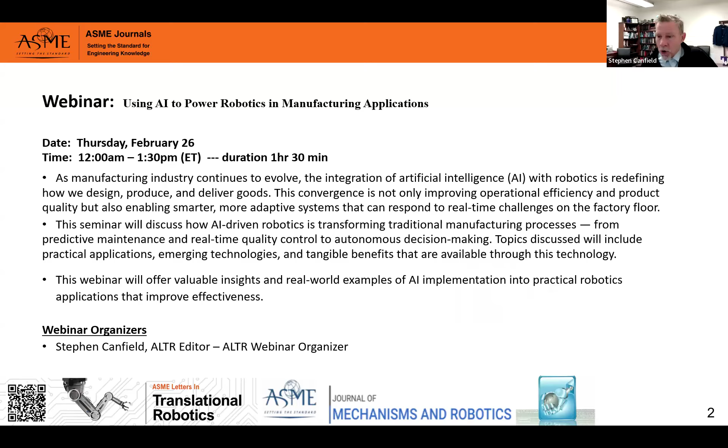Over the recent past, artificial intelligence is everywhere. It's been driven by technologies and many organizations; we see algorithmic advances, we see it in our popular media. But much less seen is this strong push for physical AI and particular applications to complex manufacturing challenges. We have with us today really the leaders in this field of physical AI applied to robotics, and I'm delighted that we have them and we're going to hear from them. The convergence of these technologies is transforming manufacturing. In today's session, we're going to explore how AI is redefining industrial automation, explore underlying technical methods, emerging technologies, and discuss future applications. So to get started, I'm going to briefly introduce our panelists.

Our first panelist and lead panelist is Dr. S.K. Gupta. He holds the Smith International Professorship in the Aerospace and Mechanical Engineering Department and the Department of Computer Science at the University of Southern California, where he also founded the Center for Advanced Manufacturing.

Prior to this, he was professor in the University of Maryland, College Park, where he was the founding director of the Maryland Robotics Center and Advanced Manufacturing Laboratory. He's a national leader in robotics. He served as the program director for NSF for the National Robotics Initiative.

He's a guest researcher at NIST, currently a member of numerous technical advisory committees, including the ARM, the Advanced Robotics for Manufacturing Institute, Advanced Automation for Robotics, and the National Materials and Manufacturing Board. He's a co-founder and chief scientist for GrayMatter Robotics, a company focused on robotic automation solutions for high-mix manufacturing applications, and he'll share more on that.

Our second panelist is Blair Simmons. He's an automation chief engineer at Raytheon with expertise in all things robotics, automation, and system engineering. He served in multiple roles at Raytheon as lead automation systems, manufacturing, and mechanical design engineer. He received his MS and BS from University of South Florida.

And our third panelist is Christopher Brown, a Boeing Technical Fellow in the Manufacturing Systems and Robotics in the Emerging Production Systems Organization within Boeing Technology Innovation in Tukwila, Washington. First, we'll have to correct my pronunciation on that. He's been with Boeing for over 20 years, providing automated solutions for various applications on composites, trimming, drilling, inspection.

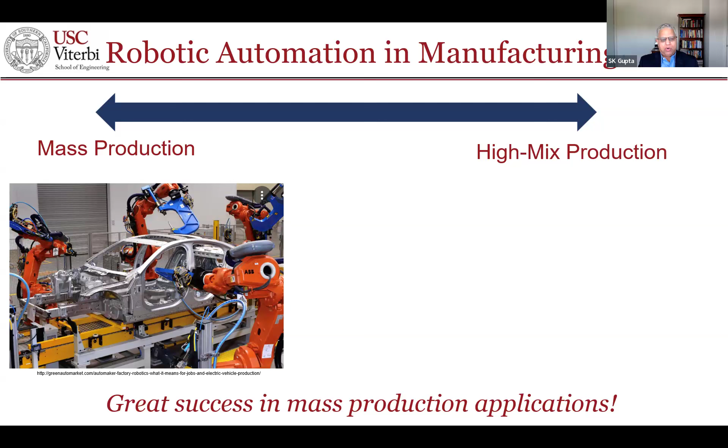Okay, so I'm going to begin with a quick introduction to this topic and show you some examples. So robotics in manufacturing application, if you look at the entire landscape, you find out that robots get used a lot in mass production, driven by all the advances in automotive and electronic sector, where everybody is using robots in these mass production lines. On the other hand, if you look at the high mix productions, robots are not utilized that much. So overall, we want to investigate what happens in high mix and how we can put robots in high mix production applications.

So the robots that get used quite a bit in mass production applications have certain limitations which make it difficult to directly apply them to high mix applications. If you have a mass production application, you're going to be using this line for years, and therefore you have a lot of time to initially set up the line, program the robot, optimize everything, and then the line will just run and keep doing the same thing over and over. And that gives you tremendous benefits and your return on investment works out.

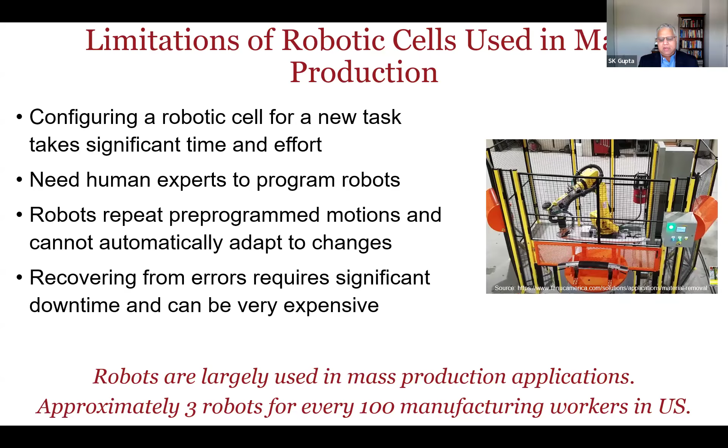However, if you have a high mix production application, then this concept where you are going to spend months building a robotics line and then utilize it is not going to work, because the part that's going to be fed into the high mix setting will change frequently. And therefore, this idea that humans will come in, program the robot, optimize the cell is not going to work. So robots currently are largely used in mass production applications, approximately 3 robots per every 100 manufacturing workers in the US.

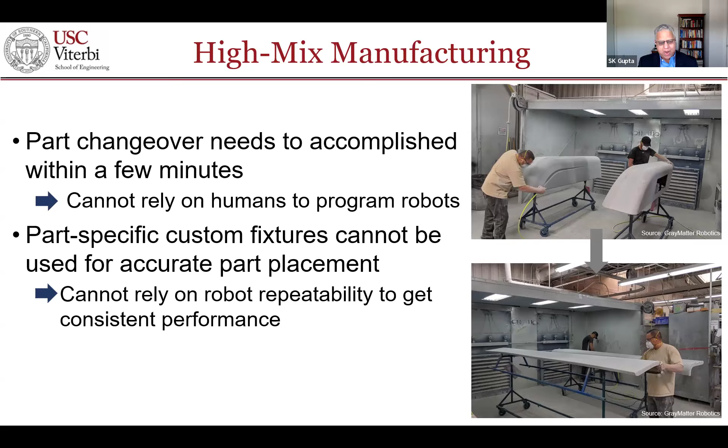In high mix manufacturing applications, part changeover needs to happen quickly. You're doing one type of part, then you need to start working on another part, and this transition has to happen very quickly. And you cannot use part-specific fixtures. You have to use general-purpose fixtures to hold the part, and therefore you cannot rely on the accuracy of fixtures to deliver the right kind of performance. And robots have to be quite flexible, intelligent and smart to work in high-mix applications.

So the reality today is that if you go look at a lot of high-mix application environments, lots of people are doing sanding, polishing, buffing, grinding, spraying, coating type of tasks by hand.

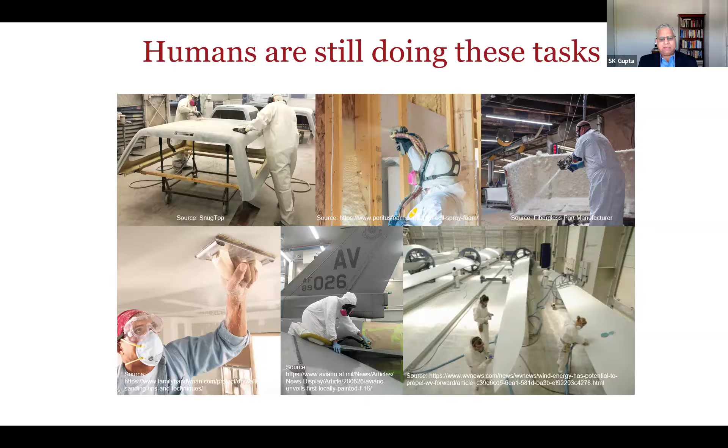And these are ergonomically challenging tasks. And people would prefer if bulk of this work can be done by the robots. If you look at the manufacturing challenge today, there are a significant number of jobs which are forecasted to go unfulfilled. There's a lot of labor shortage being reported by the manufacturing sector.

As I mentioned before, many manual operations pose serious health risks for humans. Many companies are reporting significant backlogs. And when you have a large churn of human workers, you also start seeing the issues with respect to consistency of the quality, and therefore then you start experiencing rework and scrap and consumable waste type of challenges.

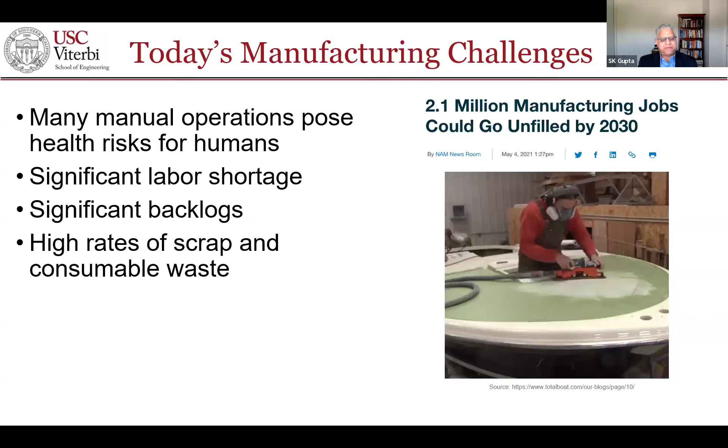So the right way to think about addressing this challenge would be to increase the level of automation in high mix applications. There are 3 key things which are currently driving progress in this overall field. One is availability of low-cost sensors. We have all kinds of sensors now available at reasonable price: 2D vision, 3D vision, tactile sensing, force sensing.

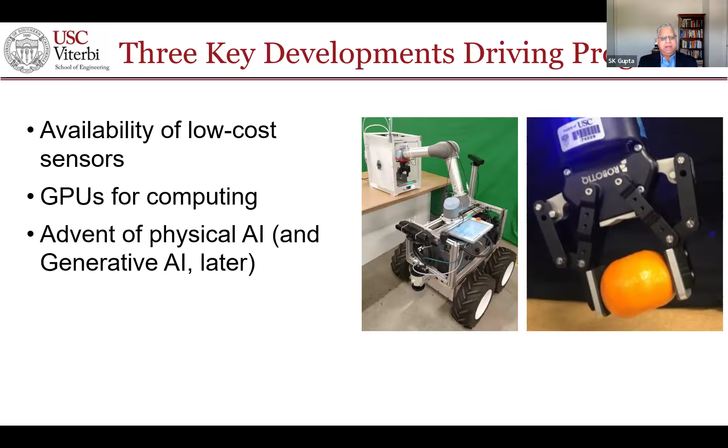GPUs, which can actually make edge compute super fast as well as cloud compute super fast. And then all the recent advances in physical AI and generative AI are also giving basically new fundamental capabilities, which is changing the landscape quickly.

If you look at the specific advances in robotics, people are beginning to now leverage stereo vision, force sensing, tactile sensing. The field is going well beyond simple position control. People are looking into impedance control, visual servo, shape control, all kinds of new control modalities. We can now do multi-arm manipulation where multiple arms can be coordinated, and therefore we can handle high degree of freedom systems.

Mobile manipulation is here, which allows the robot to go to work as opposed to work coming to the robot. And we have collaborative robots where humans and robots can work in close proximity of each other. So all these advances are creating new opportunities for us to utilize robots.

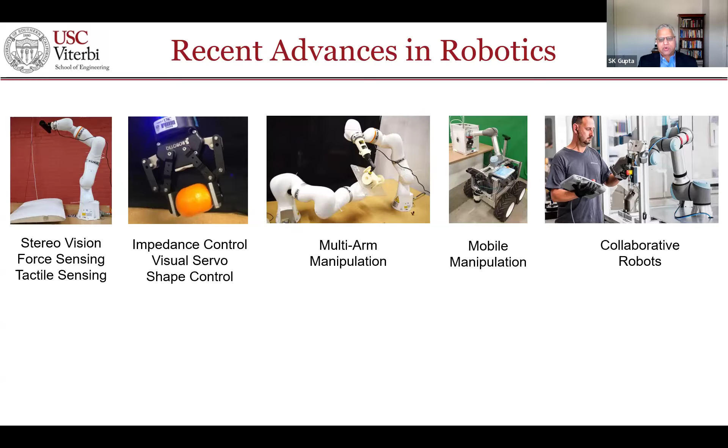So my own work is largely focused on human-centered automation. The idea there is that we want to empower people by giving them robotic tools so that the work which people should not be doing and do not want to do is actually done by the robot. So we empower people, reduce their health risk, and boost their productivity. And that's a way to handle the labor shortage issue.

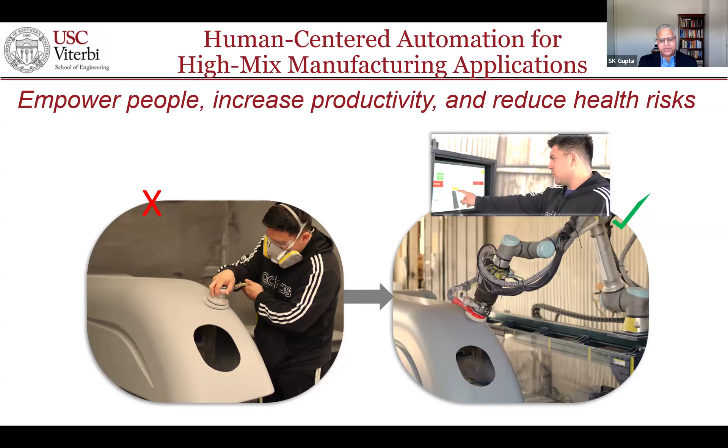Now, why do we need AI? If you look at these challenges in the production setting, the tool motions are complex, parts are large, people are often moving around them, so it's a loco-manipulation problem. People are often making adjustments right when they're doing the process, and even figuring out what the right process is for a new material, new geometry, new type of tool takes effort.

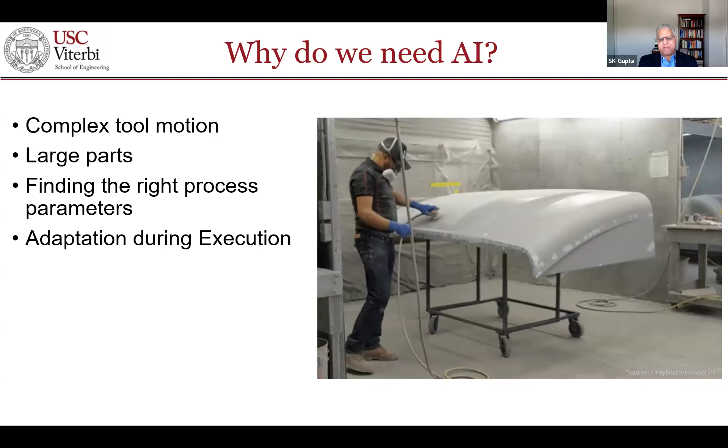So again, old style, mass production style robotics would say we should spend weeks or months figuring it out and then program the robot to do it, but that's not going to work. So the hope is that AI can actually sense the part, build the model, generate the appropriate motions, regulate the process, and even discover the right kind of process conditions to process the part.

So AI-powered robotic cells have at the bottom layer the hardware: the robots, the tools, the sensors. There's a tremendous amount of industrial robots available. So in manufacturing applications, we can continue to leverage them. And as new hardware becomes available, we can use that.

A lot of tools are already available for grinding, welding, sanding, polishing, which we can all leverage. And as I mentioned before, there are a lot of sensors available now. We can leverage them as well. So hardware-wise, a lot of good stuff exists that we can adopt from mass production. What we need is a layer above it.

We want physical AI, which basically gives the robot capability to function autonomously. And then we need robot access to process knowledge so that they can go ahead and execute the operation. This process knowledge can come from humans, and it can also come from the robot conducting its own experiments. And at the top, we need the right kind of human-machine interface so that humans can interact with these cells.

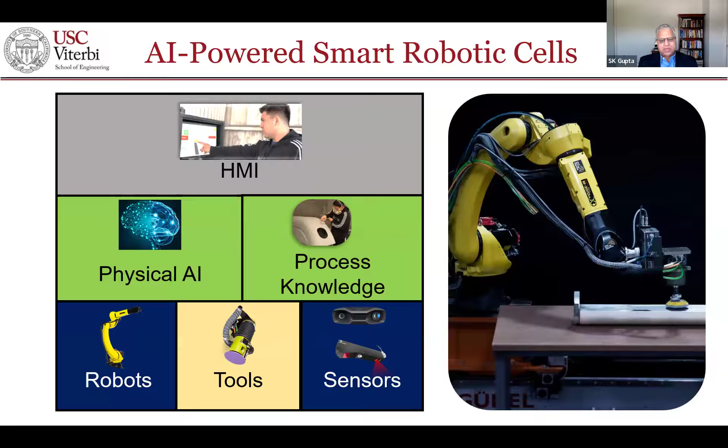So I'm going to walk through a wide variety of representative AI applications, which will show you how people are beginning to use AI in these manufacturing applications. I'm just going to go through this list quickly, show you some videos, show you some images.

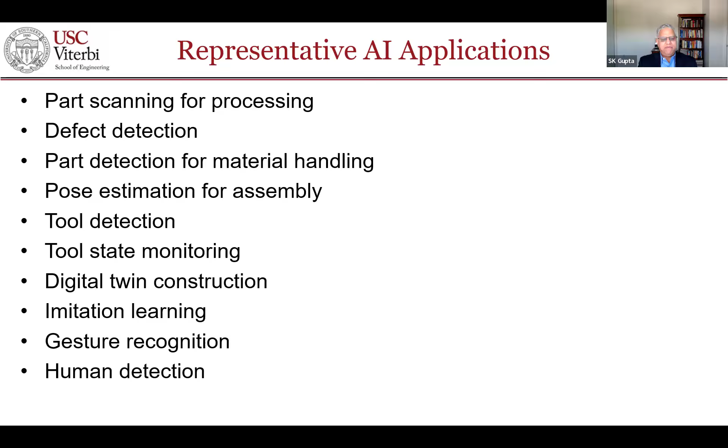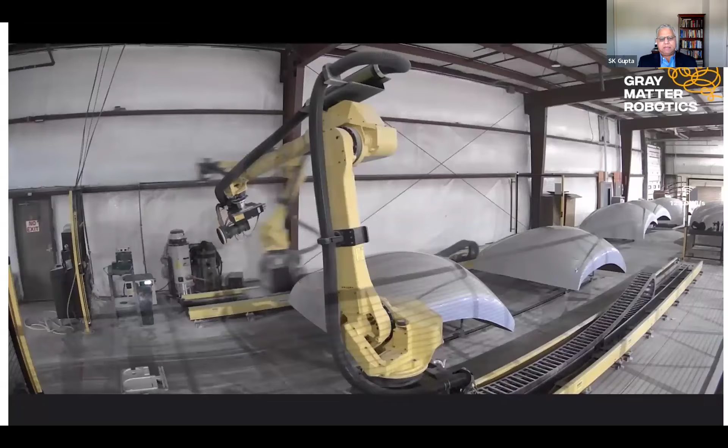So here is a robotic cell built by GrayMatter Robotics. And the idea here is that this is a dual robot cell used for performing sanding on large parts. The idea is that the operator feeds the part into the cell on a standard cart; there's no part-specific fixturing needed here. The robot scans it, builds the model, segments the model, identifies all the features which are there using the scan data, and then performs processing.

These parts are large. The cell does not assume that any CAD model exists. So it basically treats the part as a new part and then uses AI to figure out how to process it. So that's an example where AI is being used both in building the part model, segmenting it, doing the planning, and driving the robot motion.

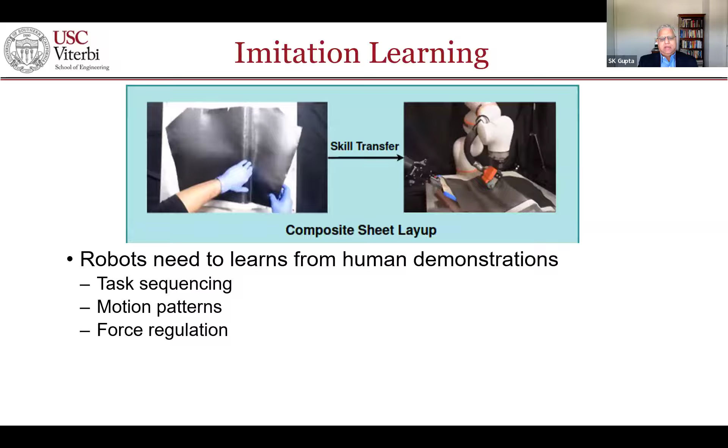Another interesting way where people are beginning to use AI quite a bit is to learn from human demonstration. People want to see how humans were doing the task and then get that information transferred to the robot. And then the robot can start from whatever humans were doing, and hopefully after that, they can do their own experiments and do better.

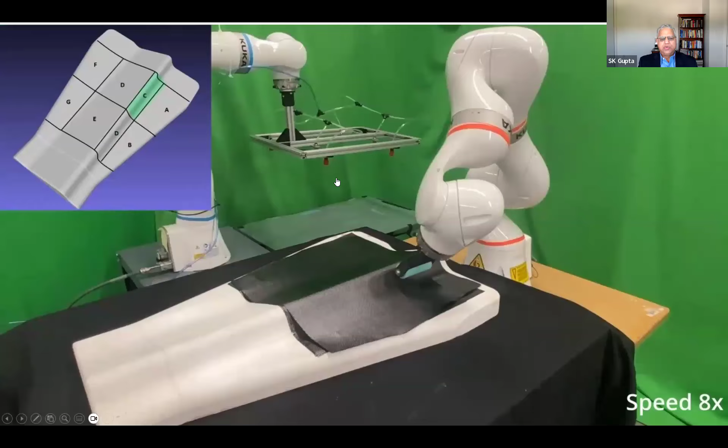So here is an example where we have a fully instrumented cell in our lab. It's full motion capture. We are capturing all the human motion, the way humans are doing it. And the tool is instrumented, so we are recording how much force the human is providing. And then the idea is, could you transfer whatever you saw from the human to the robot?

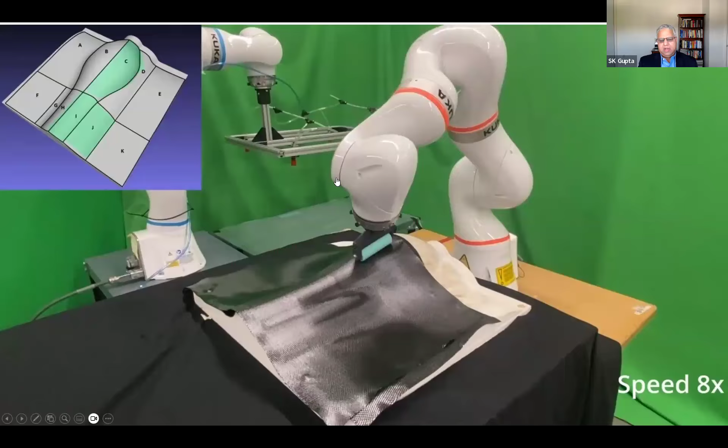And it turns out that you can use methods in inverse reinforcement learning to learn what humans were doing and get the sequence and motion right, and not only replicate the motion on the part on which the demonstration was done, but also on something slightly different.

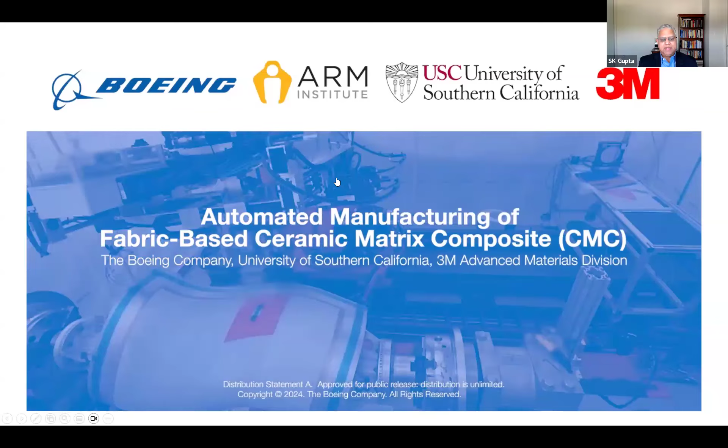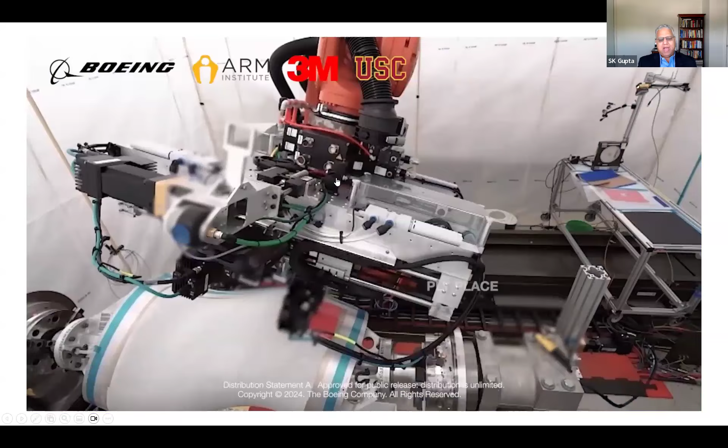Here's a project that I did with Boeing and 3M, funded by ARM Institute. Chris was one of the major players at Boeing driving this project. This is a publicly available video of that project. So again, composite layup, where the robot picks up a ply and places it on a tool. Now, of course, some portions of this video are blurred because of considerations of IP. But this gives you a general idea.

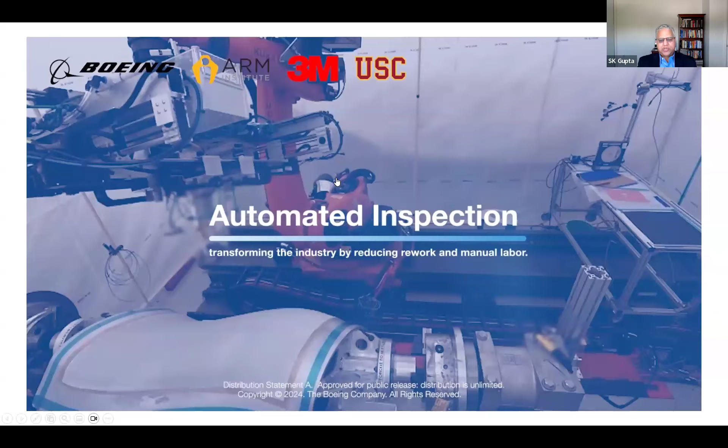The idea is, again, to integrate perception and the very complex motions which are necessary to get this done, and in real time make appropriate adjustments. So in this case, once you place the ply, 3D imaging is used to inspect it. And if there are any defects found on the part, any bubbles, or any uncompacted regions, then the robot figures out on its own what kind of rework path it needs to compact those regions. So this is showing how you can integrate rework capability and inspection capability in a cell.

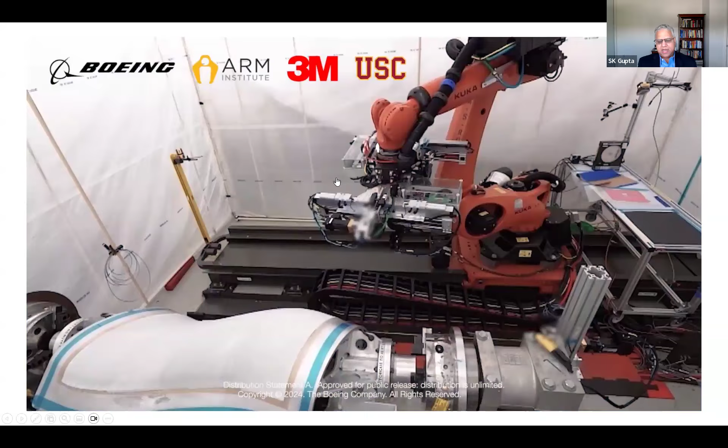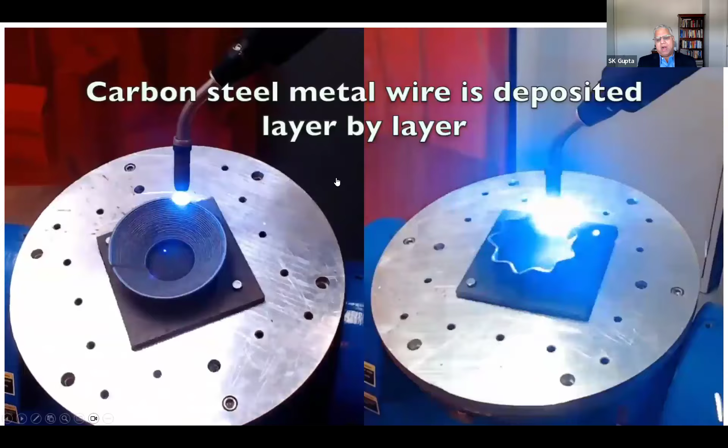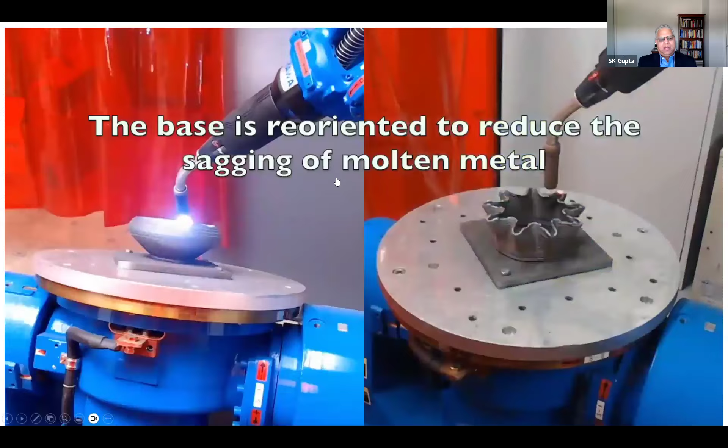Here is a robot where we converted a welder into a 3D printer. So here the idea is that a robotic welder can print 3D parts. And in this case, the challenge is that since we are using this rotary table, which tilts to eliminate the need for support structure, you really need to figure out the right process parameters, because when you deposit the material, it flows. And if you don't regulate the process parameters, you're not going to be able to form the right kind of shapes. So this again is an example where AI helps in processing the part the right way.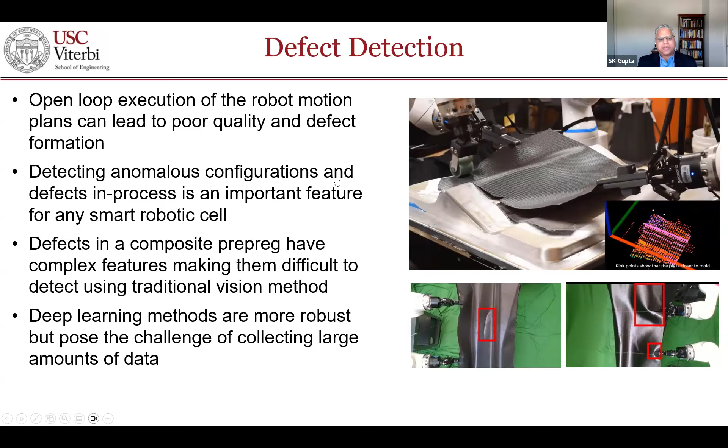We have also used AI quite a bit in detecting defects. Many composite materials are highly textured, so using traditional computer vision does not work. When you do the layup, you have all kinds of bubbles and air pockets which appear as wrinkles. So you have to detect that, and then the robot needs to perform those repair operations. So we have built deep learning based pipelines which allow us to detect these defects and provide that information to the robot, so that the robot can intervene.

And in this case, of course, training a deep learning model using only physical data is not possible. So we have built a synthetic data pipeline which allows us to combine the physical data with synthetic data to generate enough data so that we can train a deep learning network to detect wrinkles very, very accurately.

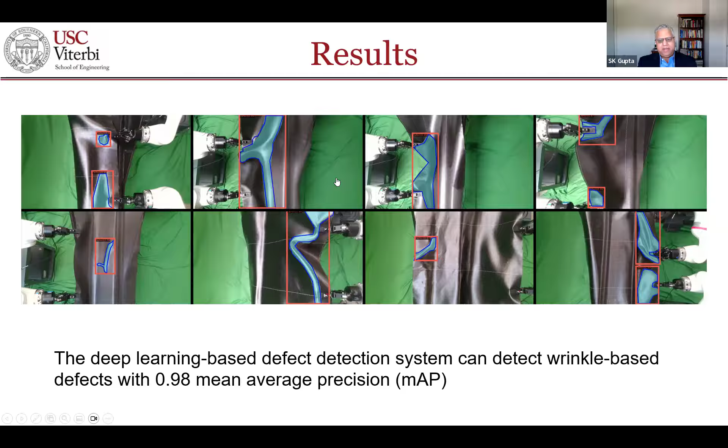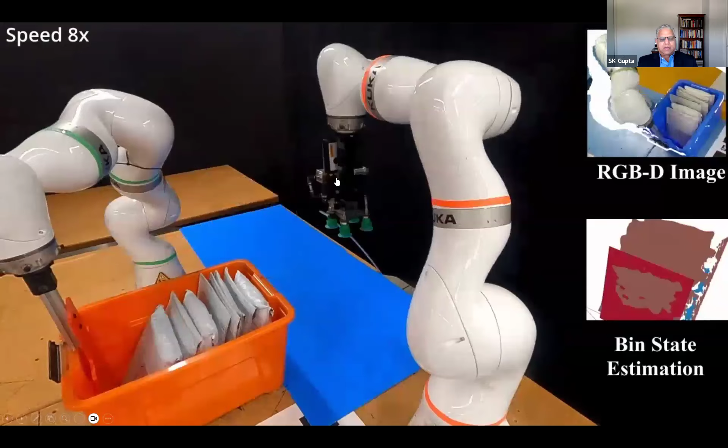We have also done work with Amazon on picking up highly compliant packages and packing them in a compact way. So this is again showing how you can use simulation to build an online system where it can quickly pick up packages and pack them in compact bins.

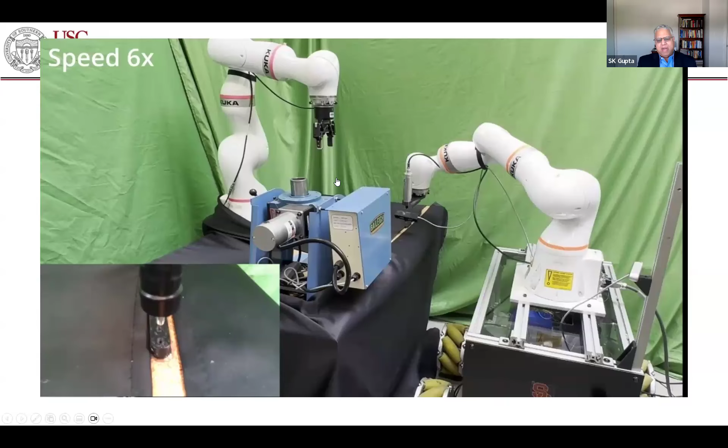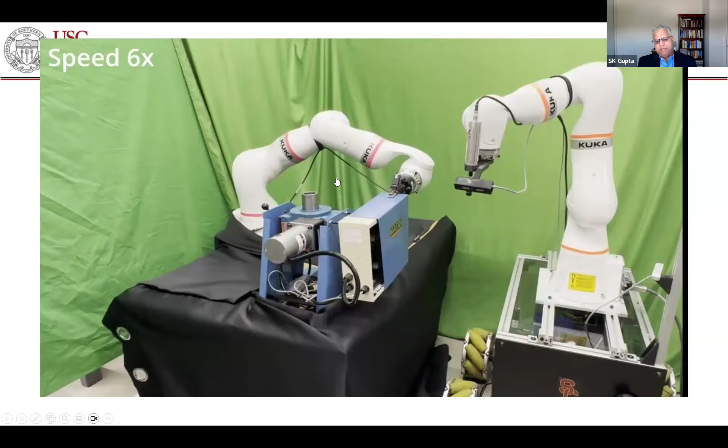Here's an example where again we are combining physical AI principles, where we are using physics-informed AI to build a model of screwdriving so that the robot can perform autonomous screwdriving. Again, we are using computer vision along with the physics-informed AI, which allows us to figure out where the operation needs to happen, and monitor the screwdriving operation to make sure that if something is not working out well, the robot can make appropriate adjustments.

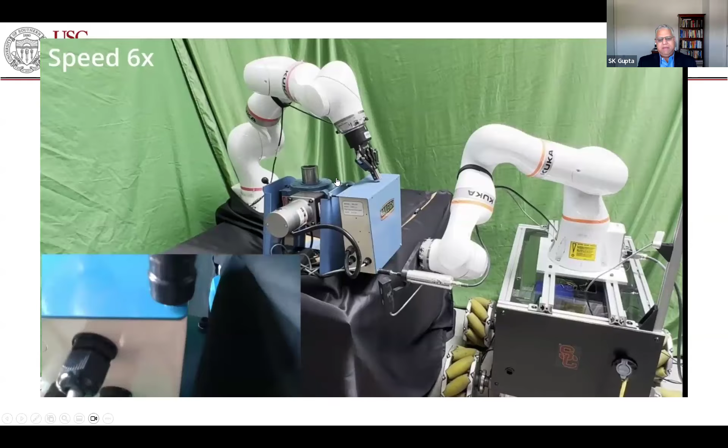So in this case, we are showing that the robot can perform autonomous screwdriving in a high-mix application. Here's an example of a project which is illustrating the machine vision capability. The idea is that a robot needs to pick up these tools and store them away. So again, we're using computer vision to make sure that we can see the tools the right way. We figured out how to pick them up and store them. In this case, we are using a specialized gripper, which has a compliant pad made out of granular media to pick up these tools.

Also, when you're performing a sanding operation, you need to figure out if the sandpaper has any life left. And if the sandpaper is worn out, then you want to perform that tool change. So in this case, again, computer vision and AI are being used to monitor the state of the sandpaper, and then you can trigger the appropriate tool changes, actually the media changes in this case. So this allows you to run the system autonomously for many, many hours, because as the sandpaper wears out, the robot can itself monitor its health and then take appropriate corrective actions.

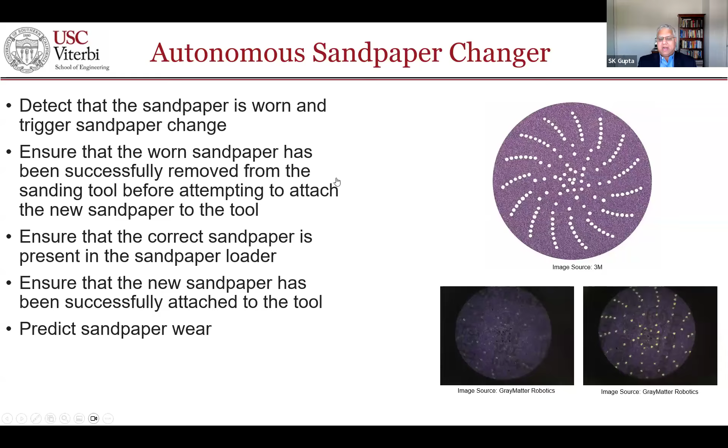And also this is a good technology so that if something is not going right in the cell, if your process conditions are not right, the wear in the sandpaper also shows you that something is not right, and then you can take appropriate corrective actions.

Also, when you deploy robotic cells, you want to make sure that you are running a prognostics and health management system to ensure that your cell is behaving the way it is expected to behave. If something starts going wrong, then you can use a digital twin to figure out that the physical signals coming from the cell and the signals your digital twin is predicting are diverging. Meaning that you were expecting a certain kind of force based upon your digital twin prediction, and your force sensor is telling you that it's not seeing that signal, then you could intervene and take a guess at what might be going wrong.

So imagine that you place the part in front of the robot and an operator forgot to clamp it. The moment the robot starts processing it, the part starts moving. If that were to happen, a discrepancy will occur, and then you can use that discrepancy to figure out what might be going wrong, bring the cell to a safe state, and then ask a human to intervene. So this is again an area where AI is being used quite a bit.

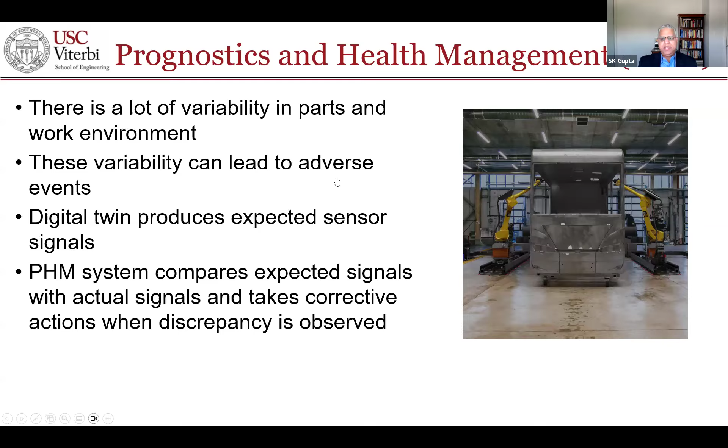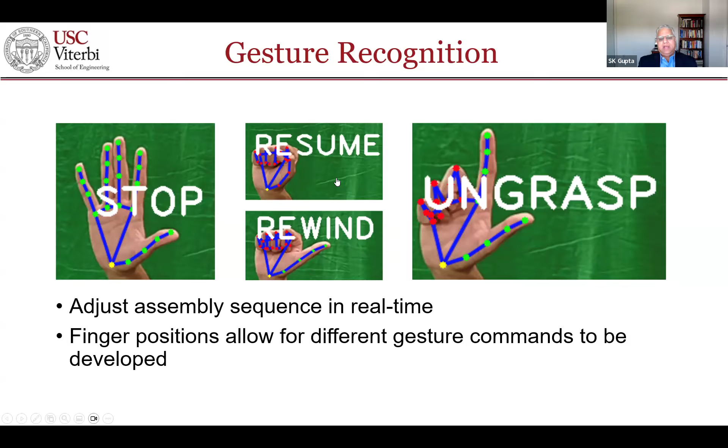A lot of times people are interested in controlling the robotic cells using gestures. So this is the human-robot collaboration piece, where people are beginning to use AI to make sure that humans can interact with the cells in a natural way. And AI is ensuring that gesture recognition accuracy is high, and people can do interesting things.

The final example that I want to use is human detection. So when you build these collaborative cells, there are collaborative zones and non-collaborative zones. Collaborative zones are where humans are allowed and can go in there and work, where we expect humans. Non-collaborative zones are the zones where humans should not be there.

So again, AI is being used for complete monitoring of human presence, and then you can figure out where humans are. And if it turns out that humans are present at a place where they should not be, then again, you can use it to trigger appropriate safety alerts, and, if necessary, shut down the robot cell. So this is another interesting area where AI is being used.

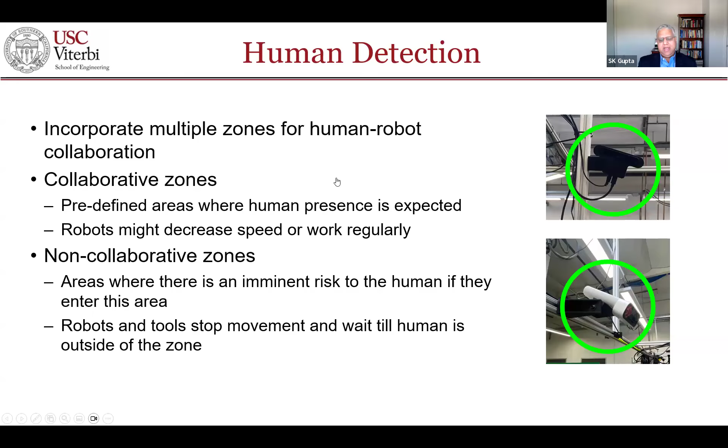So overall, I gave you lots of examples of AI being used in a manufacturing setting and different things that AI could do. People define physical AI in the context of manufacturing as AI which manages the behavior of physical systems. Unlike digital AI, which creates a digital artifact such as text, video, or an image, physical AI produces a sequence of action recommendations, which a physical system then executes to achieve the given goal.

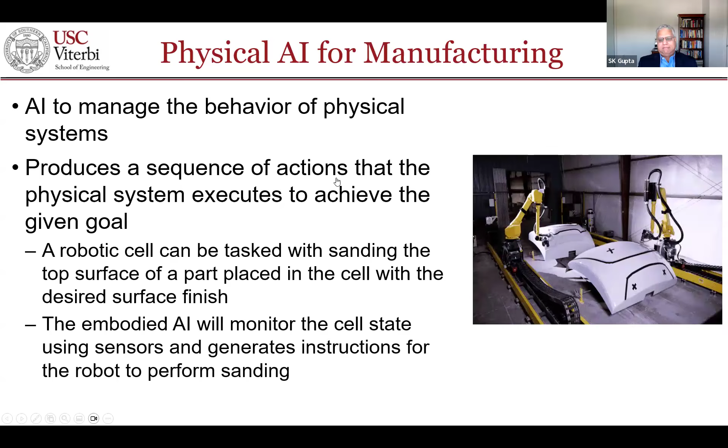For example, if you want a robot to do sanding, you put the part in the cell, and physical AI is telling the robot where to go, how much pressure to apply, what RPM to use, and what velocity to use to move the tool. Now, obviously, physical AI also monitors the cell state using sensors and then figures out if any intervention or corrective actions are needed.

To build physical AI, we need three modalities: imitation, which is basically where we start by looking at how humans are doing it. So imitation learning is the technology that people use. And recently, a lot of interesting work in diffusion policies is fueling lots of new capability in imitation learning, where we can watch a video of a human performing a task, along with capturing the data from the tool-part interaction, and then the robot can try to imitate that.

Then the next layer is exploration, where the robot can use reinforcement learning in simulation and also experiential reinforcement learning, where the robot conducts experiments in the physical world. And that then allows the robot to perform tasks even better than humans, or where human demonstration is not possible.

And finally, reasoning. When you have long horizon tasks, then you need to figure out how I'm going to chain my skills. So if I'm performing a complex assembly task, I may need to pick and place the part, I may need to reorient the part, I may need to apply adhesive dispensing, I may need to do screwdriving. So I need this higher level reasoning capability, which allows me to sequence things the right way, optimize the sequence, and then invoke the right skill at the right time.

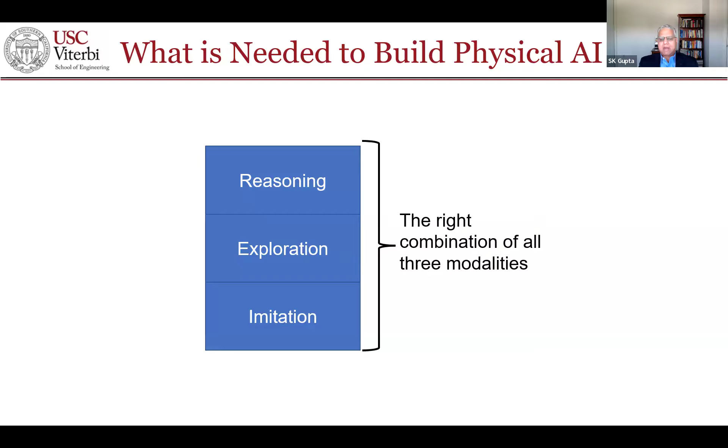So ultimately, autonomous operation using physical AI in the case of robotics becomes combining these technologies the right way. Right now, the architectures that are emerging are kind of an ensemble of AI tools. At the lowest level, you have safe learning in the physical world using some sort of control theoretic active learning type of approaches, where safety is super important, and you really want to make sure that whatever you do, you're not going to cause any part damage or tool damage.

A level above that is where you're trying to learn intermediate decision making. Reinforcement learning in simulation is a very useful tool. And at the top level, we have high level decision making, and that's where large language models for tool manipulation as well as vision language models for tool manipulation are quite useful. And in work that I do, we chain these different technologies together to make sure that we build systems which actually work in practice.

So people often ask, why can't we do end-to-end learning? Why do we need these multiple AI tools? The analogy that I like to use is learning to play golf. You probably need to get advice from an instructor that speeds up your initial explorations. Then you can watch videos of experts playing golf. You can practice in a simulator, and then you can go out and practice in the real world. Each of these corresponds to different AI technologies.

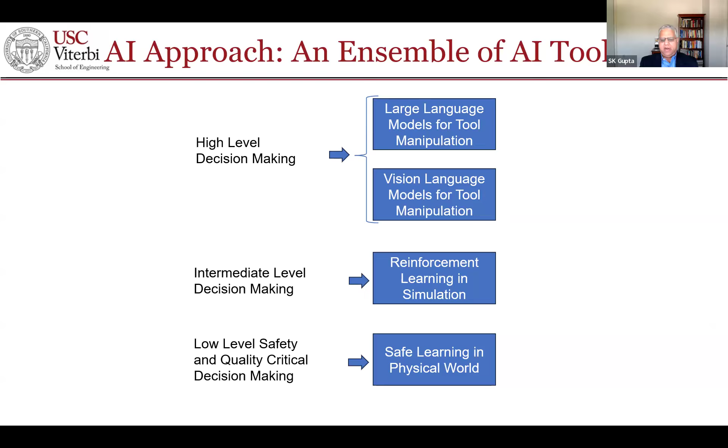And that's what the different layers I showed you in the previous slide, large language models, vision language models, reinforcement learning in simulation, safe learning in the physical world, correspond to. These are different modalities through which the robot acquires skills, and different kinds of skills.

So in summary, it is now feasible to realize autonomous tool manipulation in high mix manufacturing. And using that, we can automate things like sanding, polishing, buffing, grinding, spraying, sandblasting, assembly, inspection, welding. So all kinds of interesting things can be done. And a lot of commercial solutions are coming out in this space as well. Surface finishing and treatment, welding, material handling, inspection, these are all now commercially available. You can start utilizing them in high mix applications.

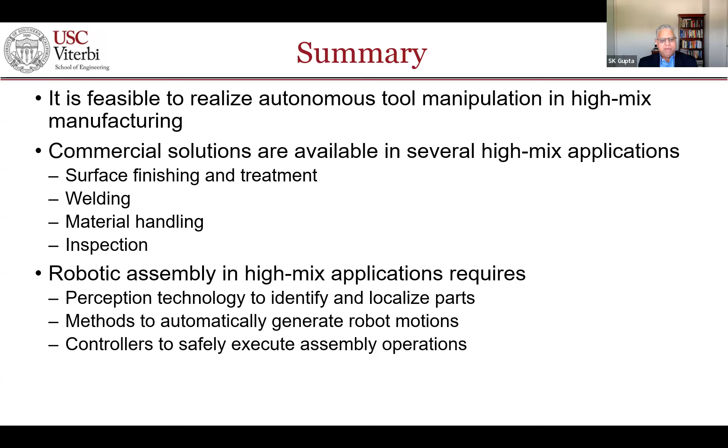Robotic assembly is another exciting area where we are beginning to see more technology maturing: perception which can identify and localize parts, methods which can automatically generate robot motion, controllers which can safely execute assembly operations. So we are beginning to see a lot of exciting things happening in the robotic assembly space.

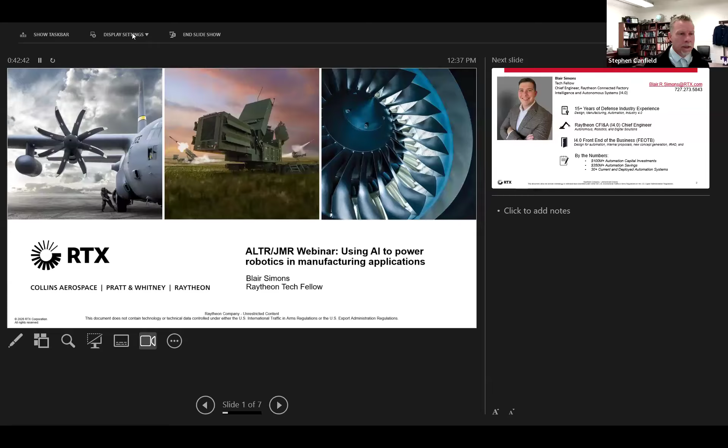Alrighty, hi everybody. Let me switch this, make sure I'm on there. Can you see the actual presentation mode? Flip your screen, Blair. Open it again. All right, let's see here. How's that? Did that work? Not yet. We're seeing your view, not the print. There we go. No. Of course. There we go. Good. How's that?

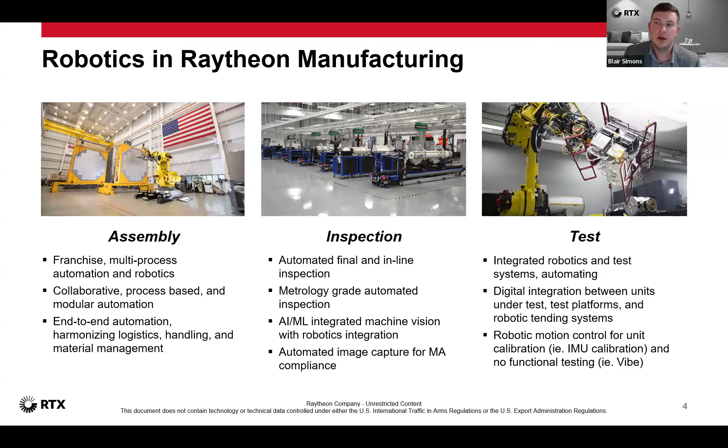So a simple example, an IMU, inertial measurement unit. We actually use the motion of the robot to teach that IMU where it is in space.

Alrighty, some of the challenges that we're starting to see. First thing is, as our products get more advanced, we start using more advanced materials, more advanced assembly methods, higher tolerances, higher precisions, exotic materials that are maybe fragile to handle.

So as our products get more advanced, our manufacturing technology needs to grow with that. And that can be a real challenge sometimes, especially when we don't necessarily have the legacy of manufacturing for new products.

So if it's something brand new, that also means our manufacturing has to start from scratch. Our automation does as well. Production scalability and increasing customer needs. So, if you just think of pure capacity, it's one thing to say, oh, we have an automation system that can build this product, and oh, the customer wants to double their production next year. Okay, great. We buy another robotic system, cut and paste.

Okay, that's great. But what happens when the customer says, I actually need you to 20x your manufacturing numbers, or it was much more drastic than that even. Linear scaling is not necessarily your most efficient way to build that and deploy automation. So we kind of have to take a step back and say, okay, instead of cutting and pasting 20 times, really not feasible, even just from a floor space perspective, right? What are some other approaches that we can use robotics and automation to really meet that need? So, not just scaling linearly, but optimizing.

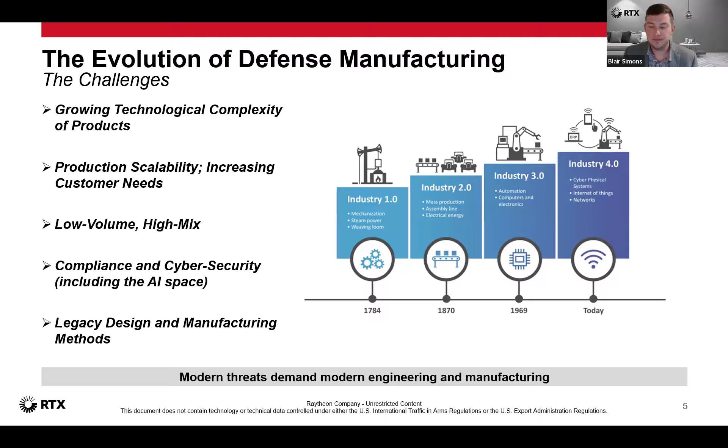And then legacy design and manufacturing methods, really working towards a shift in how manufacturing is viewed. And so, really from that industry 2 kind of mindset, going into industry 3 and ultimately industry 4. And that also bleeds into the actual design of the products. And let's see, last slide I have here. So where are we going? As robotics and the defense manufacturing, kind of specifically Raytheon. So just some general concepts here.

Self-optimization really leads into the scaling point that I was discussing before. We need our production to be flexible versus static. So static being we have one automation system that only builds this one thing. That's all it's ever done. Now we need to kind of open that aperture a little bit more and make it do multiple things. And if we have multiple of those cells, how do we optimize the flow between different automation and robotic systems?

Human robot teaming at scale. So we do have some limited collaborative robotics, and a lot of that comes down to the specs needed out of the robotic system. But we do have more of that, always continuing to grow there. Digital twin driven manufacturing goes back to, we can't think of data and the physical product as 2 discrete entities anymore. Digital twins really helping us merge that. Flexible production and reconfigurable robotics, self-learning and diagnostic.

So diagnostic, with traditional robotics, if we have a fault on the system, it'll freeze, it'll say, hey, something's wrong. It'll pause there until somebody can go and address that, whether it's an operator on the floor, a technician, an engineer. Really where we're trying to move is, can the robotic system actually fix and heal itself? And then integrated logistics and robotic handling. So, if we're thinking end-to-end of robotics versus, traditionally it's just been an assembly cell, a test cell, an inspection cell, or maybe a combination of 2 of those. How do we integrate the full end-to-end with robotics?

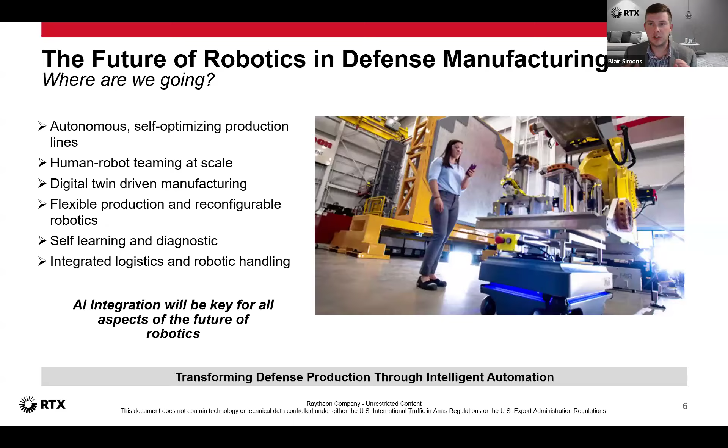And really the key takeaway here is AI can play in all of these spaces, and it will have to. And so whether it's AI used for optimization or for automatically configuring or the diagnostic portion, AI is going to start to be a key in a lot of these aspects.

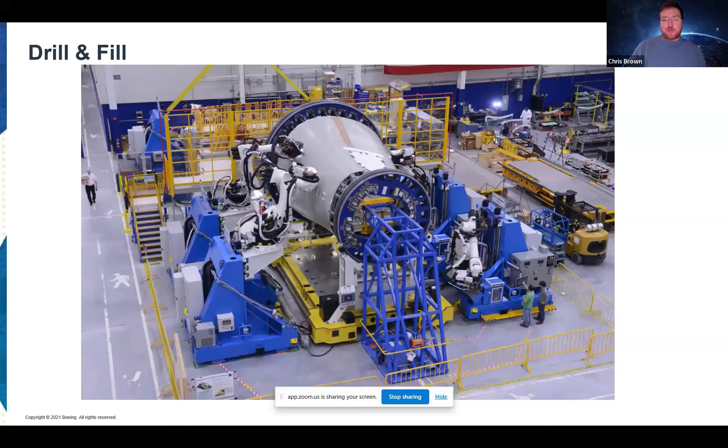One of the other major components you'll see at any Boeing facility is automated fiber placement. Again, choreographed robots, NC programming. The robot goes through the motion. It's a huge burden to program. It's a huge burden to verify. And once it's set in place, assuming all conditions are the same, it works well. However, again, it does what it does. And once it understands there's some sort of an issue, it stops. It requires human intervention.

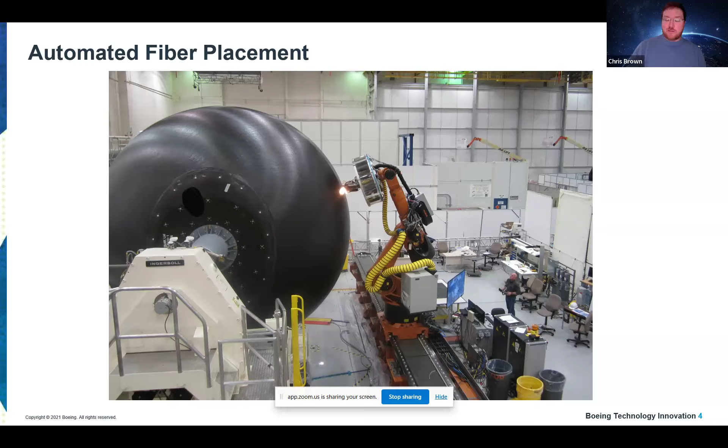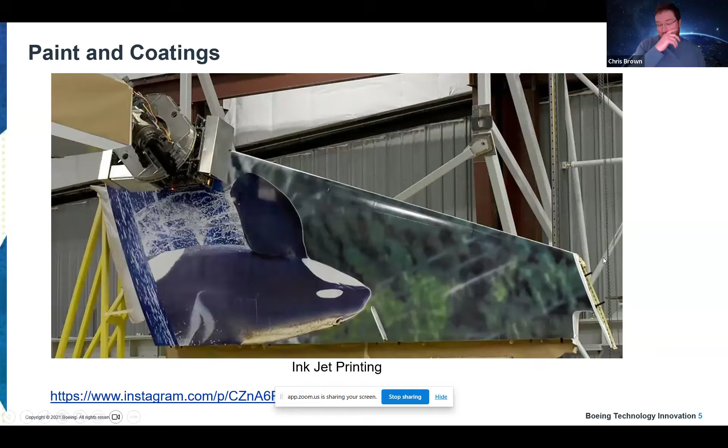One of the more advanced, again, choreographed automation is inkjet printing, painting. Many of you may have seen some articles of this, as it's the Alaska Airlines tail. Again, really intricate, a lot of machine controls to do something like this, but it's offline programming time. It's hours and hours and hours of human intervention. And in order to make something like this happen, it is just a lot of human involved labor.

So the scale, again, the size, and when you look at the rate, even though we might not be building components like the millions of cars coming off the line, the rate of our high rate airplane, the 737, is upwards right now of about 31 a month. However, there are millions of operations on every airplane that comes out. So at those rates, there is a lot going on, and the automation has to bear a good brunt of that. How are we looking at mitigating those challenges and adding intelligence into our process? There's a number of steps.

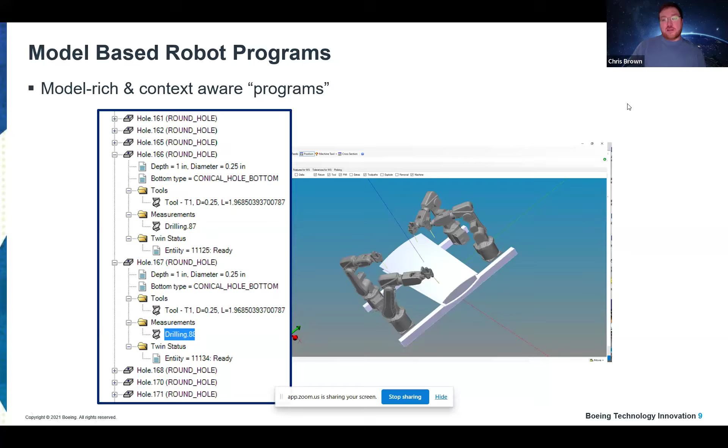And again, this was echoed in the last two conversations, but it all starts with model-rich data, context-aware programs. You embed not just a standard STEP file, but all of your process data needs to be embedded in your model. Not just hole size, but what fastener goes in, what you're going to be drilling, how you're going to be inspecting, what is happening around it. Every aspect embedded within the model allows you to start adding in self-diagnostics, having the equipment understand what the intent behind its job is.

Advanced planning and control algorithms: instead of just purely offline programming, choreography, NC programs, and the robot going through the motions, you add in smart planning and control systems, state-based systems that understand what's going on through that context-rich model. You have known safe points that the robot is able to be at. It understands entry and exit points from every location, and you supplement that with those NC program paths on the back end. But it allows the robot to understand what it's doing, if it was successful, and keeping all of those records and decisions within the process.

So this is adding the first layer of intelligence into, let's say, a drill and fill system. It knows exactly what it's supposed to drill, what happened. It inspects the data. If there is an error, it logs that, and it knows through a decision tree what it might be able to do next.

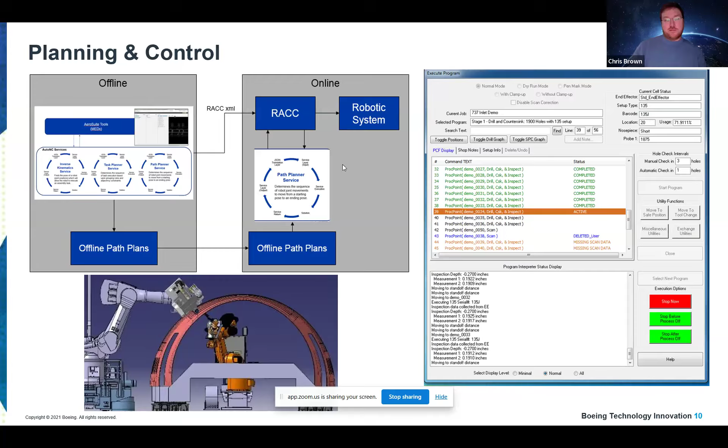Another advancement we need to understand, and again, echoed through the last two conversations, is digital twins, virtual commission cells, not just understanding where a robot goes in 3D space, but how it gets there, what is connected to it, what its escape paths might be. And it can understand different scenarios that might play out in the cell and automatically adjust and create paths along any given set of conditions. This is moving a lot further than just traditional manual NC programs and NC generation.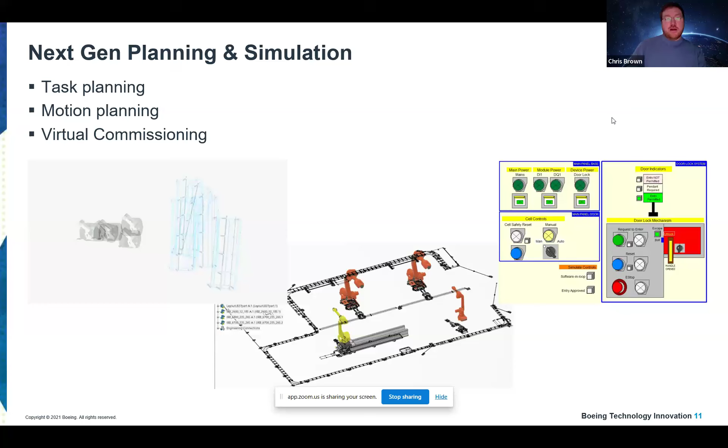Another one you've heard echoed between Blair and SK is true collaborative environments. Today, you have collaborative robots out in space, but normally that is to relieve the need for safety cells, safety things. And the whole point of most of the cells is to have a robot working and a human working fairly close by, but to mostly avoid each other.

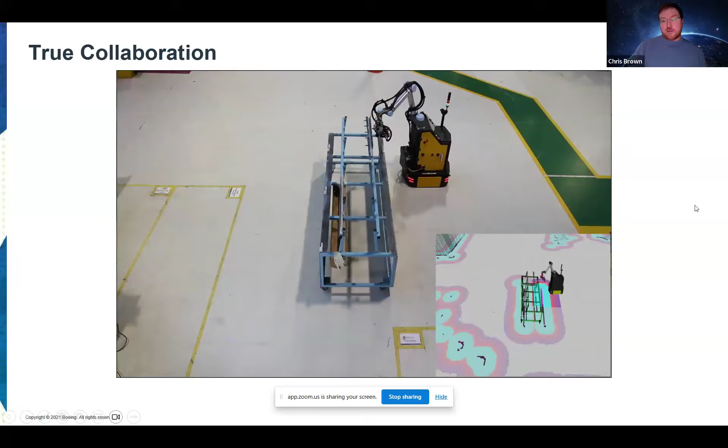One of the jokes one of my coworkers tells is, rarely or never would you come home and say, I had a very successful day at work. I didn't hit anybody, and we worked separately off to the side.

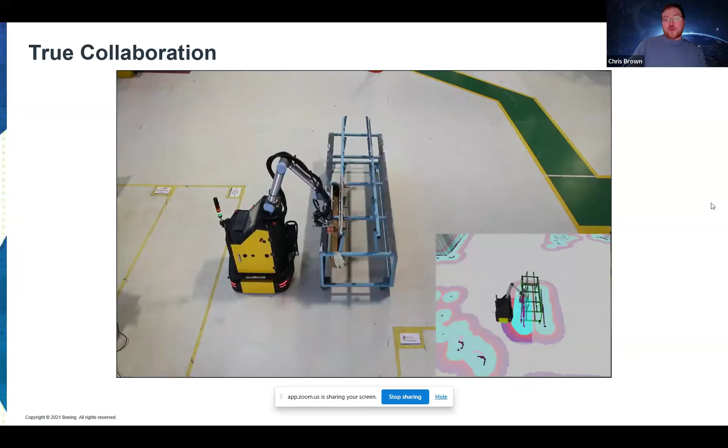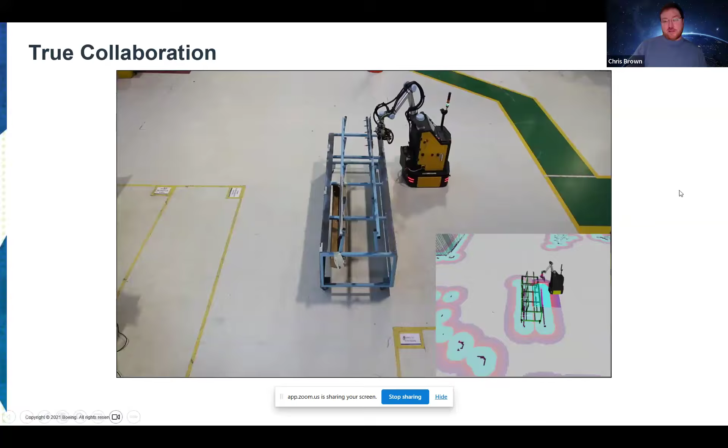So in order to enable a higher mix of human and robotic integration in the same space, we need to add intelligence to better understand what a robot is good at, what a human is good at, and actually work closer in the same space as opposed to just using area scanners and safety sensors and partitioning off spaces.

One of the big uses that we have been implementing quite a bit of, and kind of the first pass into AI ML space, is using vision systems to add robustness into processes. Everybody is familiar with general machine vision. You have geometric pattern matching, shape matching, manually taught things, and you might have a high standard deviation when you're trying to locate parts or holes. When you add in neural networks, ML, AI, we've been able to increase confidence, lower the standard deviation of errors by significant margins, and add in that layer of robustness.

The next steps that we've been working through ARM and other collaborations is leveraging AI ML generation capabilities to supplement training data. One of the major situations for creating any of these data sets in a manufacturing space like aerospace is we don't have a ton of data in order to feed these models. We have a limited manufacturing subset, but if we can create some fake images, let's call them deep fake images, to supplement training data, then we've had good success with models to actually validate that, increase the teaching subset, and again, increase robustness.

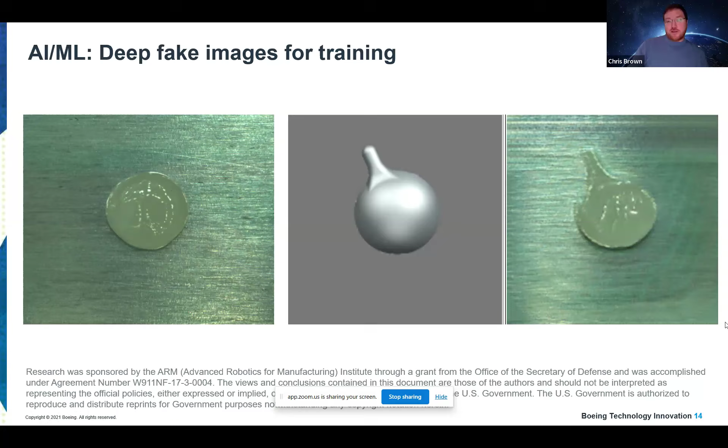The big focus through our organization with all of these measures we're looking at is increasing automation robustness, removing the need for humans to engage on any single thing, and improving the decision making.